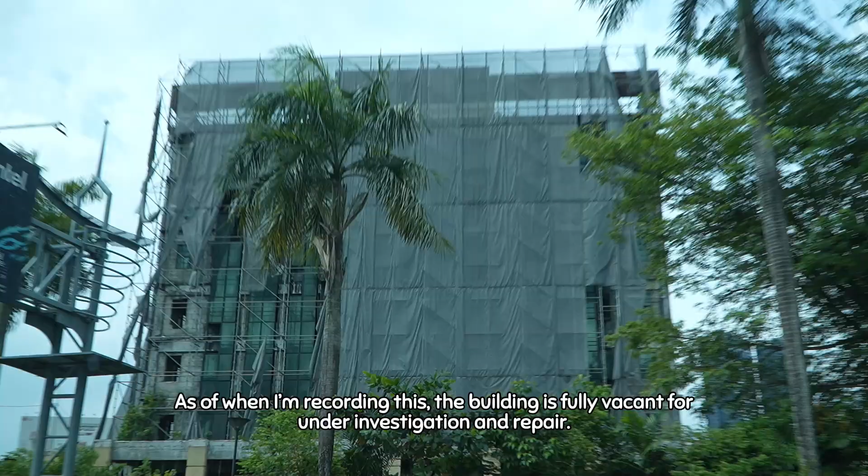As of when I'm recording this, the building is fully vacant, under investigation and repair. As for the previous tenants, they have since moved to a new location nearby.

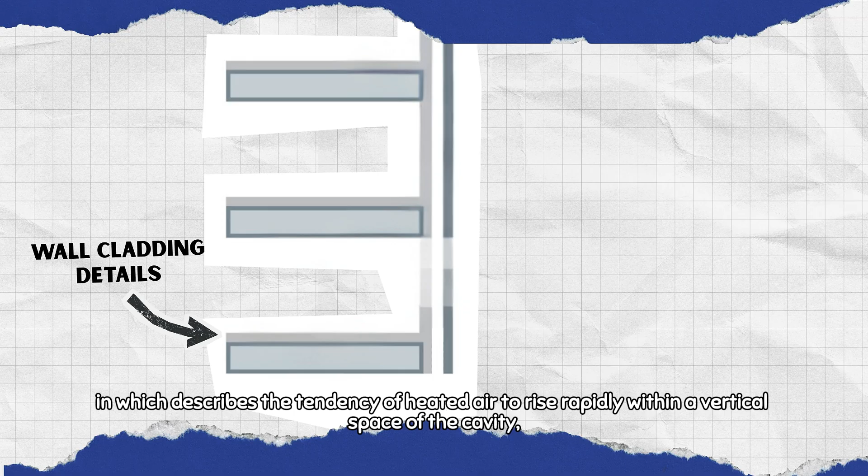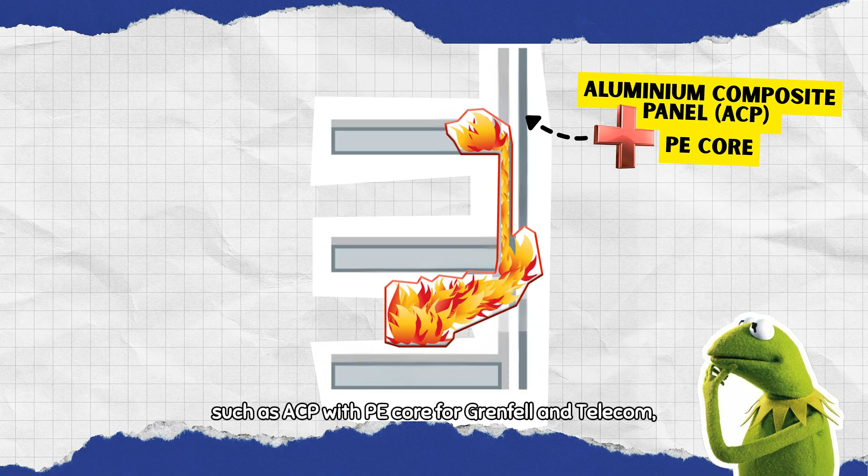They have a common way of getting their flames to spread within minutes because of the chimney effect or the stack effect, which describes the tendency of heated air to rise rapidly within a vertical cavity. Plus, with their flammable exterior cladding such as the ACP with PE core for Grenfell and Telecom, and expanded polystyrene for KWSP, these two factors became a huge risk for fire safety, which brings us to our next discussion - our fire codes.

So guys, I'm at the whiteboard here to discuss different codes and standards for external cladding fire safety systems. I have listed down different codes as you can see here. For my American friends, I believe you are more familiar with the NFPA 285, developed in the USA, that focuses more on internal flame movement to the facade.

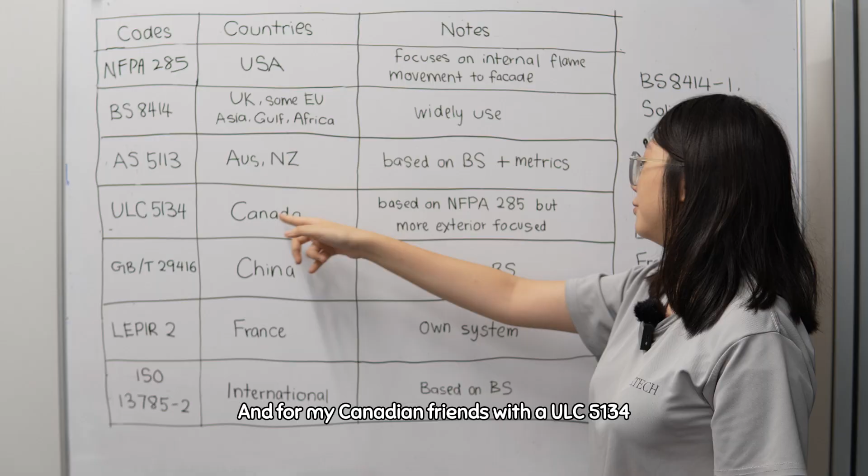For my Canadian friends, with the ULC S134, I believe it's more based on the NFPA 285, but more exterior focused. And what I'm more familiar with is the BS 8414 developed from the UK by the BSI. It is more widely adopted, such as for ISO, the international standard, which is based on the BS. For China, Korea, and other countries, they are also basing it on the British standard.

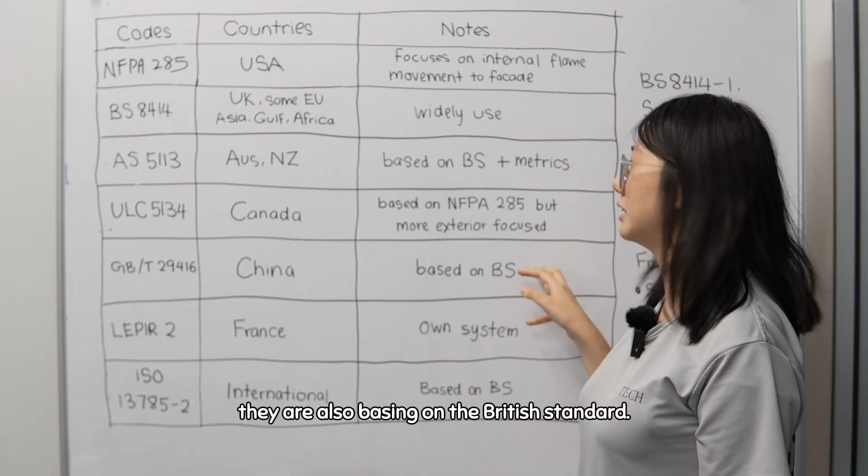And of course, we have the AS 5113 adopted by Australians and New Zealanders, with their own metrics as well, such as debris and toxic fumes. And for France, they use their own system, but I'm not sure because I can't read French, so I'm not going to dive too deep into it.

For the BS 8414, it is divided into two parts - one for the solid wall and one for the frame wall. The solid wall is based on the masonry system such as bricks and concrete, while the frame wall focuses more on steel and timber. From here, I will discuss the criteria of how it works.

BS 8414 is a large-scale system test that mimics a fire breaking out of a window and exposing a cladding system to a severe fire. The test must run for 60 minutes and pass the following 5+1 criteria without any early termination. Otherwise, it is automatically considered a failure. The criteria are as follows.

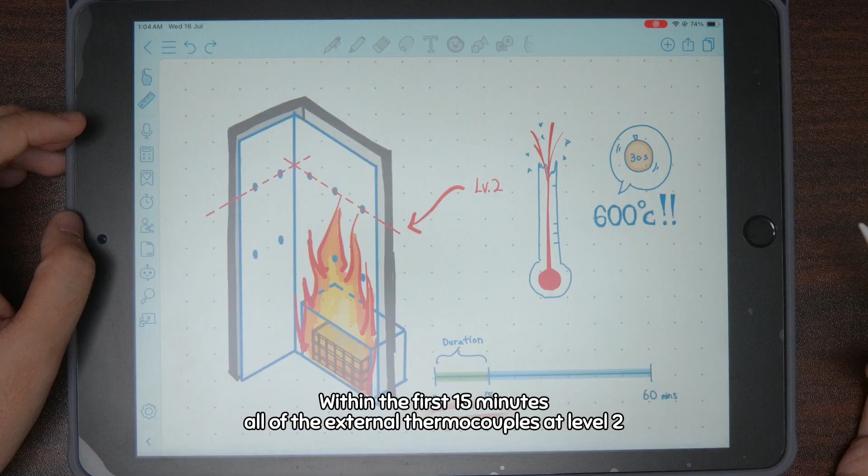The first one is external fire spread. Within the first 15 minutes, all of the external thermocouples at level 2 must not exceed 600 degrees Celsius for a duration lasting 30 seconds.

The second one is the internal fire spread, similar to the first criteria, but this one is for the internal thermocouples that are hidden inside the cavity.

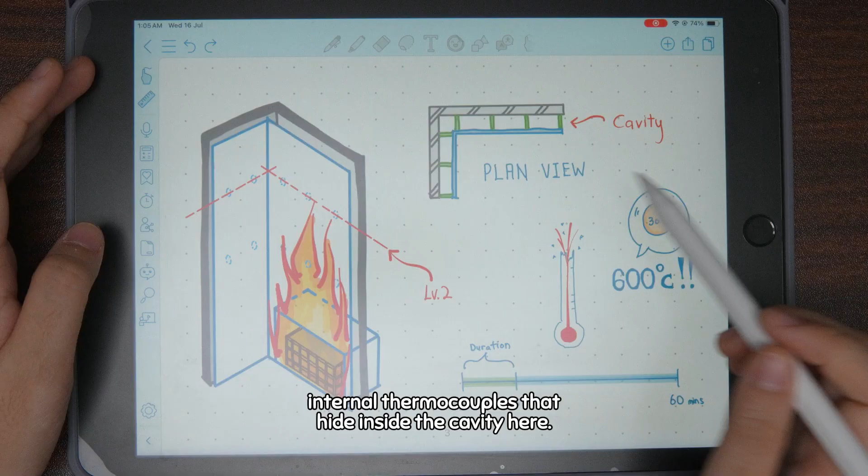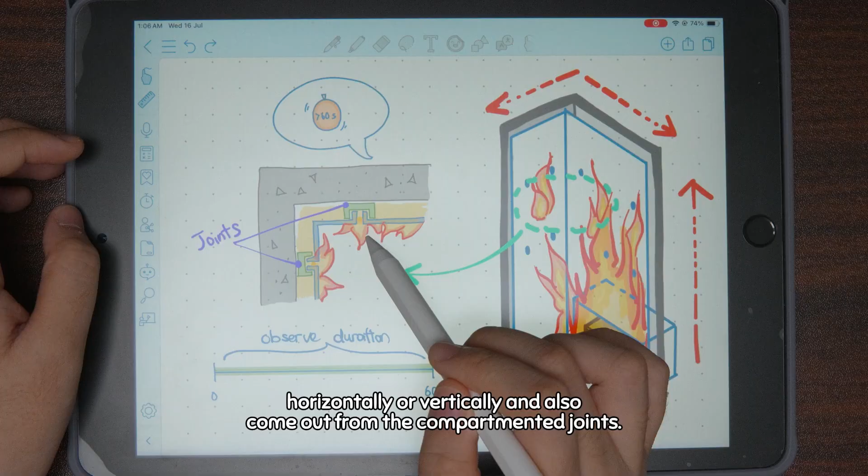The third one is visible flaming. Additional visible flaming should not spread beyond the flame of the crib, horizontally or vertically, and also should not come out from the compartmented joints. Visible flaming is defined as a glowing and continuous fire that lasts more than 60 seconds.

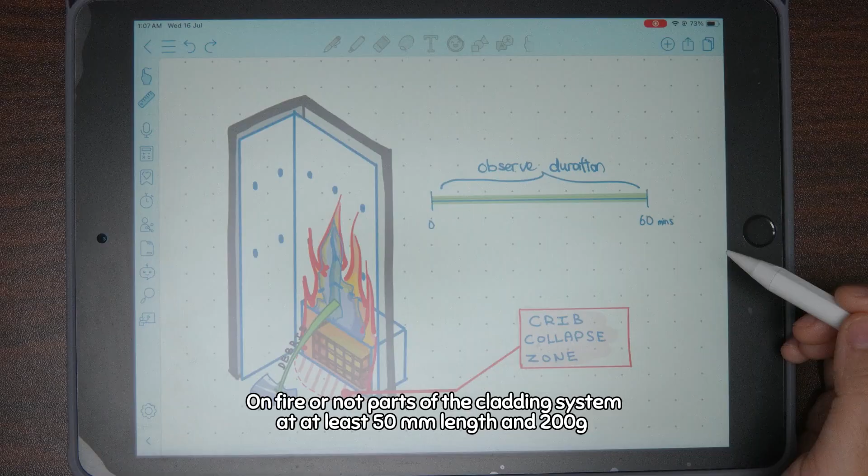The fourth one is mechanical performance. On fire or not, parts of the cladding system at least 50mm in length and 200 grams should not collapse to the floor outside of the crib's collapse zone.

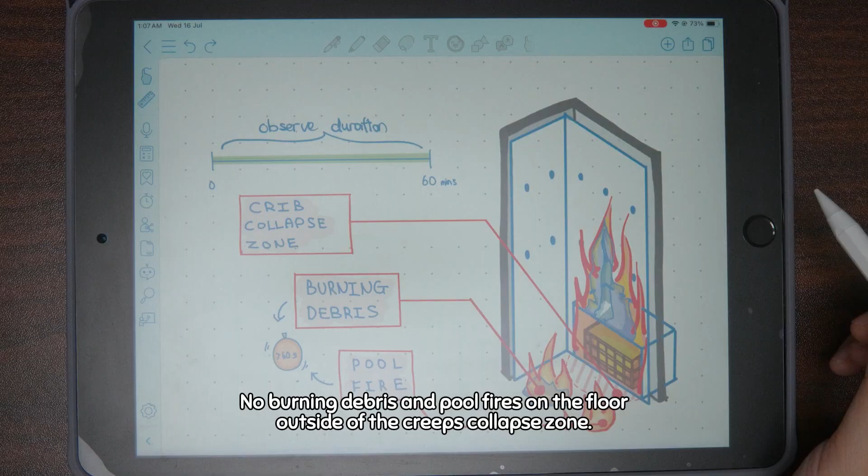The fifth one is burning debris and pool fires. No burning debris or pool fires should occur on the floor outside of the crib's collapse zone. Again, burning debris and pool fire is defined as visible flaming that lasts more than 60 seconds.

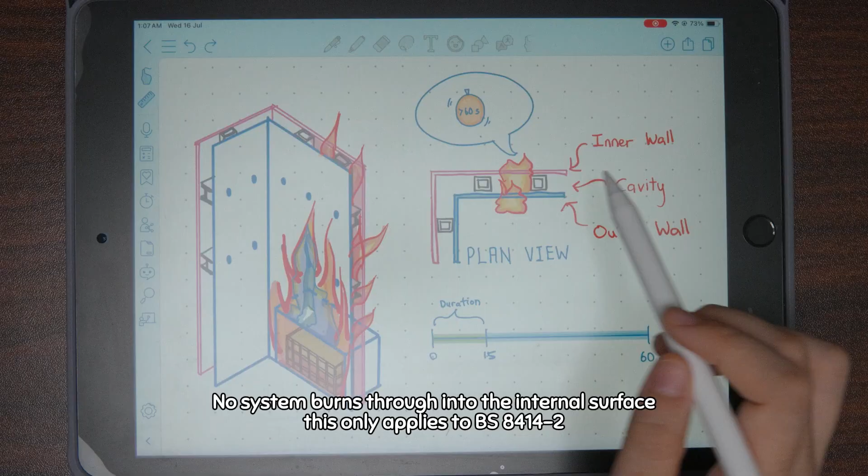The last one is the additional requirement for BS 8414-2: no system burns through into the internal surface. This only applies to BS 8414-2, which is for framed walls as previously mentioned. This is why cavity barriers are needed to compartmentalize the facade.

I'm Dato Jason Kwan from Facade Resources Sdn Bhd. We are one of the system owners of the 8414 system.

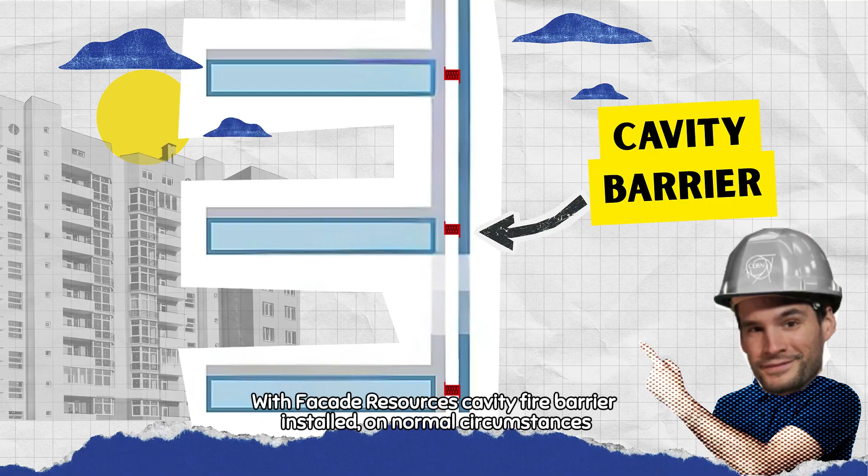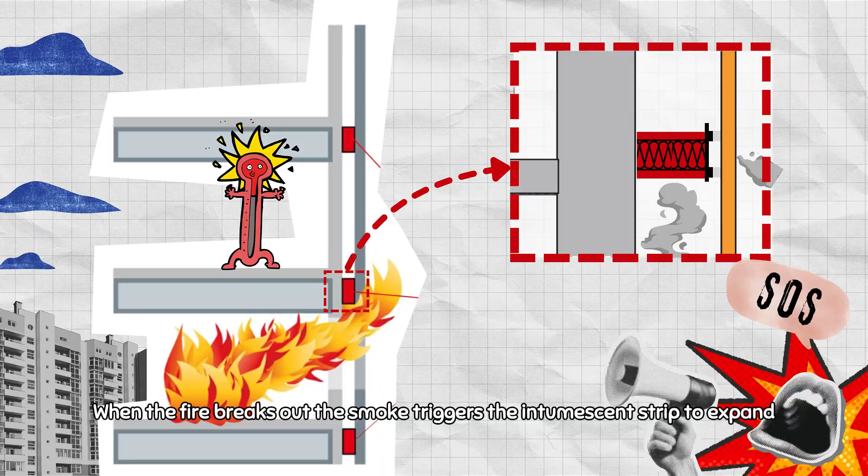With Facade Resources cavity fire barrier installed, under normal circumstances there will be a small gap for the wall cavity to function normally for air circulation. When fire breaks out, the smoke triggers the intumescent strip to expand, creating a fire compartment that blocks the fire from spreading to other parts of the building.

Our system is one of the most customizable, 100% locally made in Malaysia, and this system is also compliant with 8414.

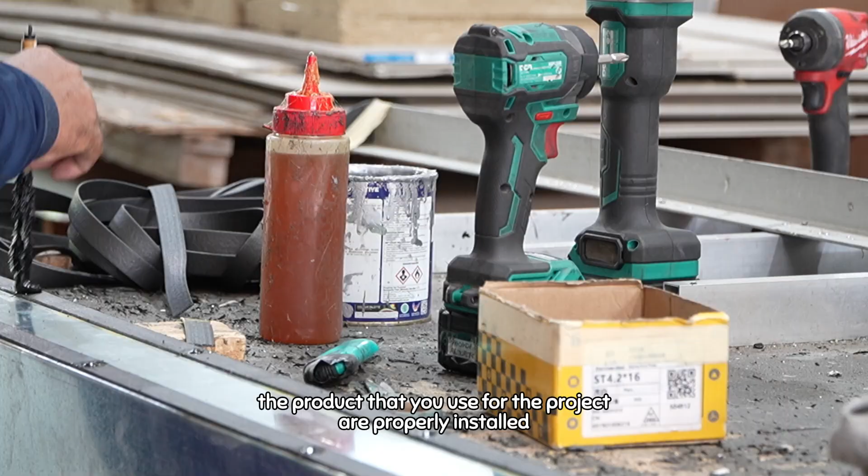Among the good benefits of our system: number one, we provide full demarcation for your project if you choose to use our system. This full demarcation is very important to ensure that the products used for the project are properly installed and reinstalled at the right place throughout your project.

Number two, we also provide a free review from a fire consultant if necessary, which gives more assurance that the product you use with us is actually fire compliant.

On top of that, we also provide full QA/QC on all the products you use. For example, if you use ACP or solid panel in your project, we provide a full comprehensive QA/QC free of charge so that you know the product you use is also of proper quality.

Last but not least, we also provide constant site reports to all relevant stakeholders, especially consultants, architects, and project owners, so they know the progress of installation at their site is up to date. Most importantly, there is transparency in the whole project.

We have just covered the risk of facade fires, fire codes, cavity fire barriers, as well as services. While it is good to have these codes and legislation now, I would like to point out: for the facades of older buildings, especially those with materials of high flammability risk, would they need to be revised and installed with new cavity barriers?

We know that prevention is better than cure, but for existing buildings, should the developer bear the cost, or is it now the tenant's responsibility? It might be costly at first, but if you don't take action as soon as possible, it will be like a ticking time bomb. Lastly, I want to ask: is your building still safe from fire?